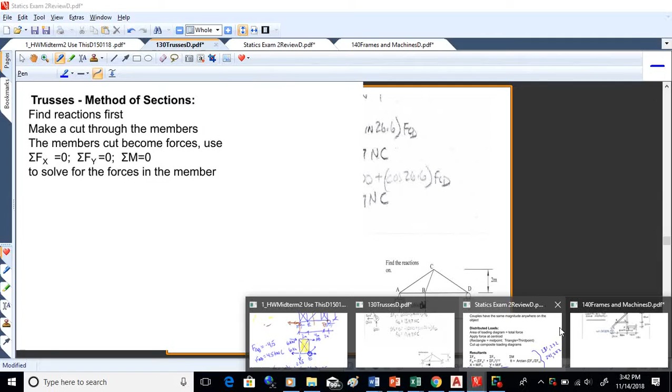All right, and just to start some new material here, this will not be on the midterm, but it's the next thing we're going to look at, and it's frames and machines. So what we have with frames and machines are members that are assembled together, kind of like trusses. And what machines do is move things and exert forces. What frames do is bear a load.

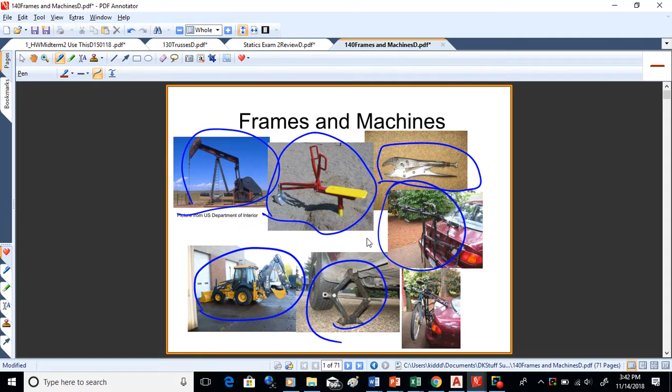Now, these are different than trusses in that you can't assume that each of the members are two force members. That's a key assumption in trusses, but it is not used in frames and machines. So a frame doesn't move, it supports a static load. A machine does move, it exerts a force and moves a load.

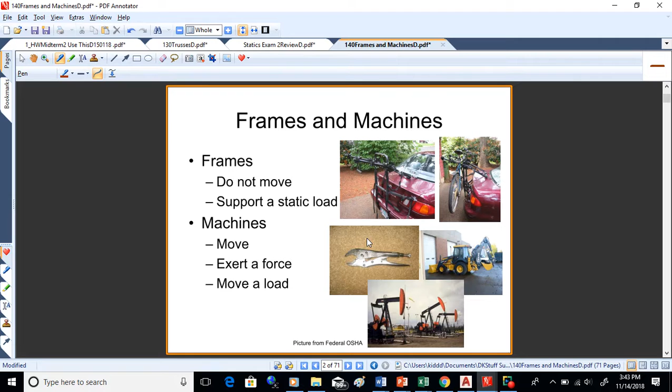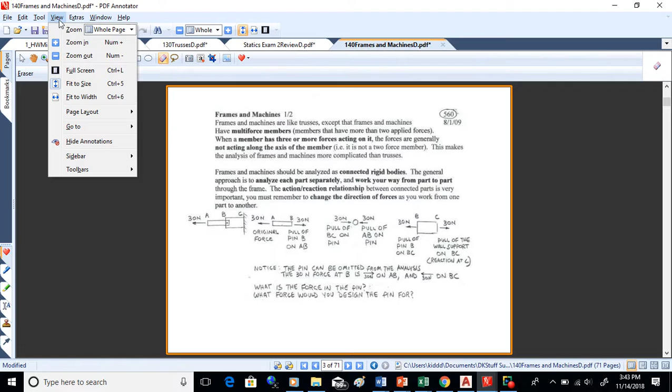All right, now if we look at some of the parts of analyzing frames and machines, what we want to look at here is we pull these things apart into exploded views. That's what we do with frames and machines. So I'm on page 560 here. Now, if we were just to take this simple little mechanism here and break it up, what we could do here would be to break it up into link AB, and then the pin, and then link BC.

All right, and if we work our way through it and see what this 30 Newton load is doing, well, if it pulls to the left, pin B will pull B to the right to hold the linkage in equilibrium. So at A you got 30 to the left, and at B you got 30 to the right on the linkage. Now what's pulling on the linkage is this pin. So if the pin is pulling B to the right, AB is pulling the pin to the left. So there's the 30 newtons that AB exerts on the pin.

Now if that's happening, BC will pull the other direction. So that'll be 30 to the right. So we got 30 to the left on the pin from AB, 30 to the right on the pin from BC. Now if we take that to this larger plate here, BC, that has this cantilever attachment to the wall, what's going on there is the pin is pulling B to the left because BC is pulling the pin to the right. What that means is the pin is pulling BC to the left, okay? And then the reaction will be back to the right.

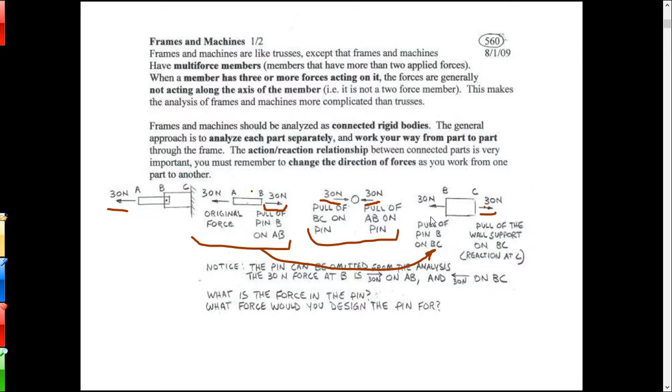Now, as you do that, you want to remember to reverse the directions of forces as you go from one member to the next. So at B here, the 30 Newton is to the right. That's on AB. So on BC, the 30 newtons is to the left. Okay.

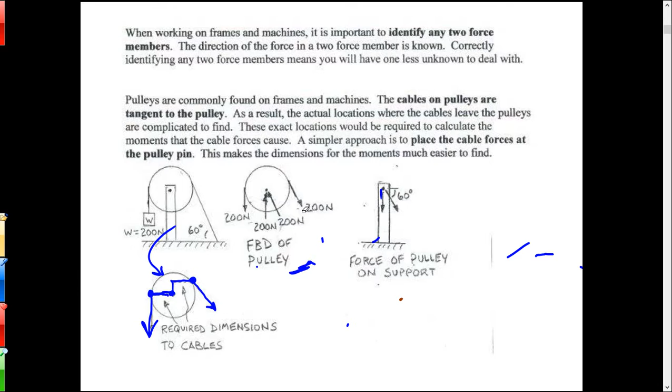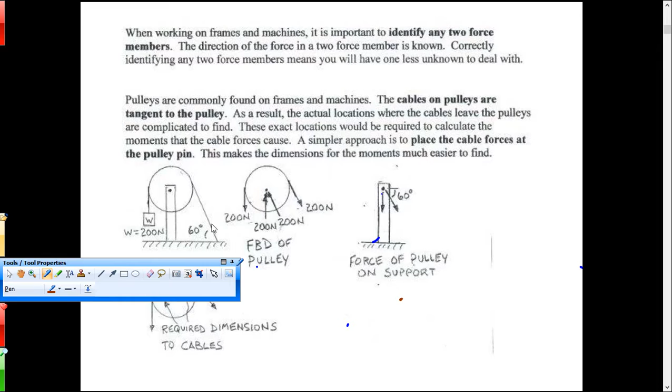All right, now another thing we get into here are pulleys sometimes, so let's have a look at that. Now these pulleys would be in static equilibrium, so they're not spinning or rotating or doing anything like that. So what we would do here is we would have a look at how these affect the members that hold them up. In this case, it would be this vertical member that's holding the pulley up. So let's see what the effects of that would be.

All right. Now, what we're going to have here is this cable that wraps around the pulley. The force in it will be 200 newtons everywhere in there because it's in static equilibrium. So we've got 200 pulling down here and down and to the right on the other side. So we would end up with this diagram here of how that cable affects the pulley. Now, if we want to start working with this whole object, we're going to need moment arms here quite often to calculate moments. We're going to have to look at these little offsets over here, this one over here to the left, to get to where this cable force attaches to the pulley.

And then we've got one up here as well, up and to the right. Okay, so those little dimensions are going to get a little complicated. So we can use a little technique here to simplify this quite a bit. We can look at a free body diagram of the

pulley. And if we look at the forces on the pulley, those cable forces, there's going to be forces of the pin back on the pulley equal and opposite. So we're going to have forces like that on the pulley exerted by the pin to counteract these two forces here, okay? And just as we were doing before, we can look now at what the pin does to this standard here, this vertical member.

If the member here is pushing up on the pin with 200 directly up and then up and left with the 200 here, what the pin does is the opposite. It's going to push down on that member and down right on the other side there, okay?

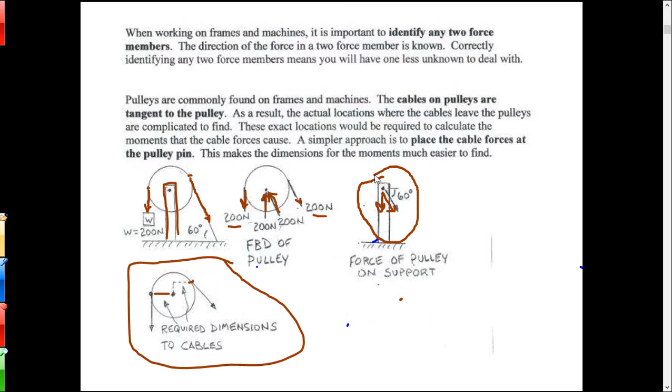So the gist of this is you can take these cable forces and move them to the pin. You've got to move them both at once, so you can pick both of those cables up and just attach them right to the member and analyze the member in that fashion, and that'll work out just fine. So that's a simplified way to analyze this member, where you can avoid having to calculate all these little offset distances here, okay? So that's normally how we do it. We just take the cable forces and move them both to the pin on the member.

Okay, the last little thing here I want to go over is on 561, and that relates to the fact that we can't assume that these members are two-force members. That's not how we approach these problems here. So if these were two-force members, now they're not, but if they were, if that were a truss, what you could do is just look at this reaction here at A, that's a roller, so that would be a vertical reaction, and then use this equation here to analyze the force in ACG. And it would be pretty straightforward.

But when you're doing a frame, as we're seeing here, you can't assume that ACG is a two-force member, and it's not. I mean, you've got three forces in there at A, at C, and at G. So I can't assume that I've got an axial load doing this. I just can't assume that that load comes in at 30 degrees down left anymore, because ACG is not a two-force member, okay? So this complicates the analysis a good bit.

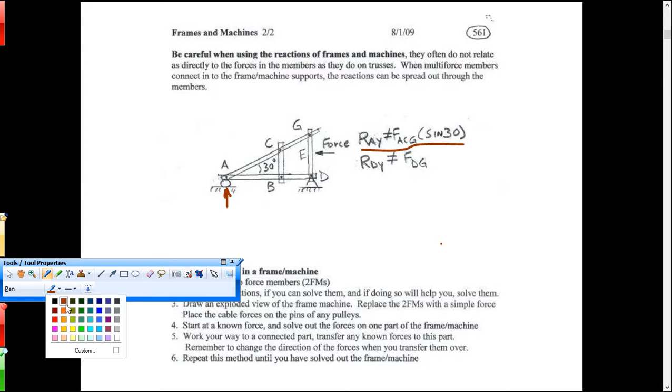So for these frames and the machines too, you can't make that assumption that I've got there, okay? It just doesn't work. So you have to go through a little bit more of a complex analysis to get these forces figured out. So you can't assume that, nor could you make a similar assumption at D, okay?

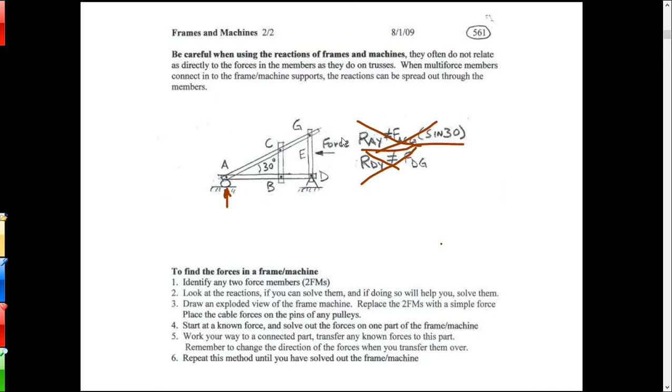Now, it is important to identify two-force members in frames and machines, because that can greatly simplify your analysis. So if you look at this one here, this triangular frame, there is one two-force member in there. Have a look at it, maybe just think about it for a minute and identify it, because you do want to be able to identify these, okay? And it's CB. See, two pins, no force in between. That's a two-force member. ABD has three pins, so it's not a two-force member.

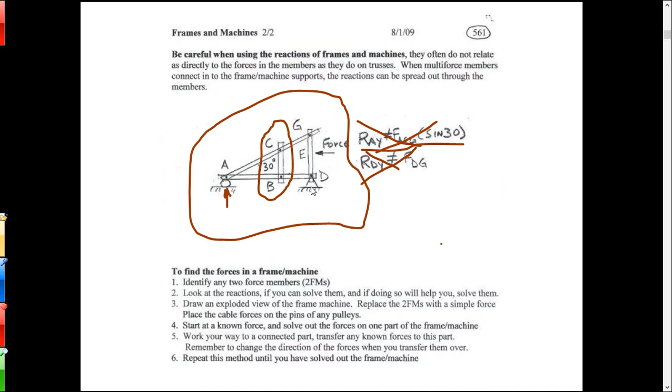ACG has three pins, so it's not a two-force member. GD is actually GED because there's a force applied in the middle. That has three forces applied to it, so that is not a two-force member. So the only one is BC.

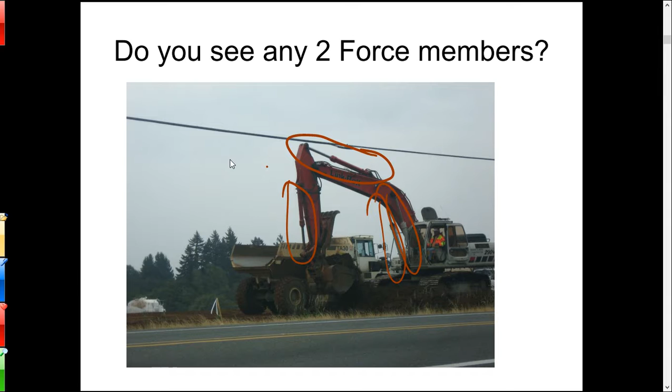So we'll start next time in analyzing some of these frames and machines. The general approach is to create an exploded view of the frame and machine and use equilibrium analysis to work your way through the problem.